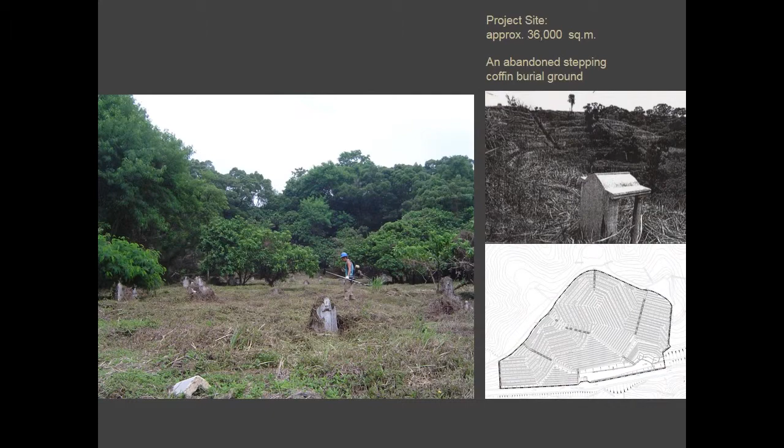The design of the columbarium makes use of nature to create a park-like environment for worshipping. The site was originally an abandoned stepped burial ground. The main niche block is tucked into the valley of the existing topography to minimize slope cutting.

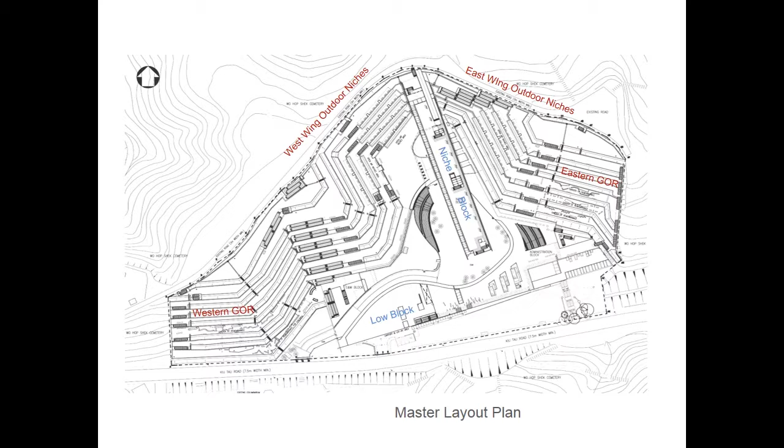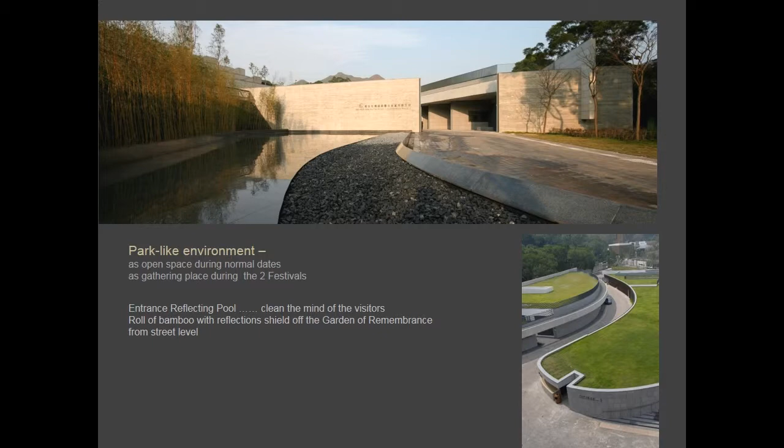A meandering path brings thousands of visitors to the central plaza area during the Qingming and Chung Yeung Festivals. They are then distributed to the main niche block as well as to the external niches through the two large steps. A reflecting pond located at the entrance helps to clear the minds of the visitors before they enter into the premises.

Timber strips are introduced to the facade of the niche block. They help to shield off the unwanted views of the niche bays when viewed from the street below, and at the same time they give warmth to both the exterior and interior of the building.

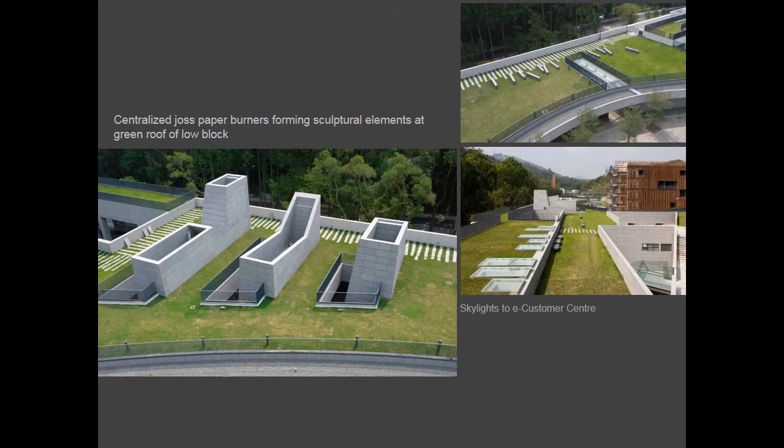By deleting the incense burning troughs at the bottom of the niche walls, and by relocating the joss paper burners to the lower block, an almost smoke-free environment is now provided for worshipping. The chimneys of the burners also form sculptural elements of the roof garden of the lower block.

To cater for the needs of the young generation, an electronic customer center is provided for carrying out worshipping through internet services. A spiral lawn outside the center symbolizes rebirth after death in Chinese culture. A reflecting pool with stepping stones ending at the middle of the pond symbolizes the revisiting of one's life when one looks down to see his own reflection under the sky in the water.

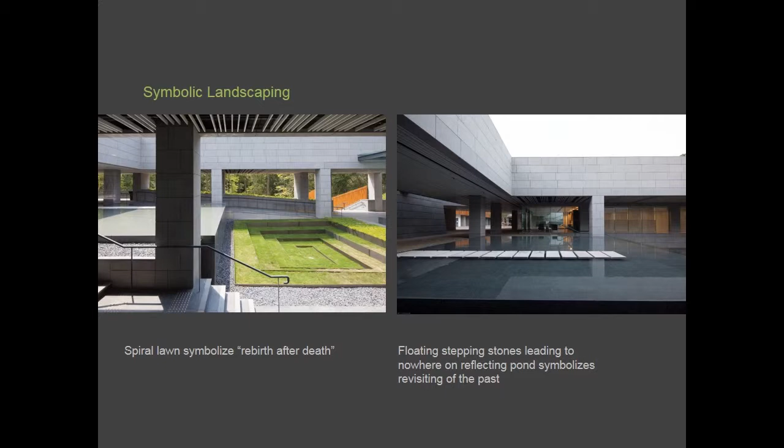Various themes are also introduced to the Garden of Remembrance to encourage the use of bone ash scattering as an alternative to niche burial.

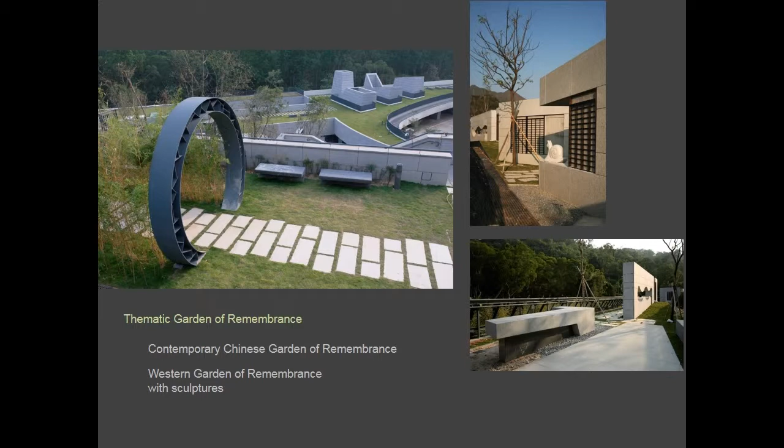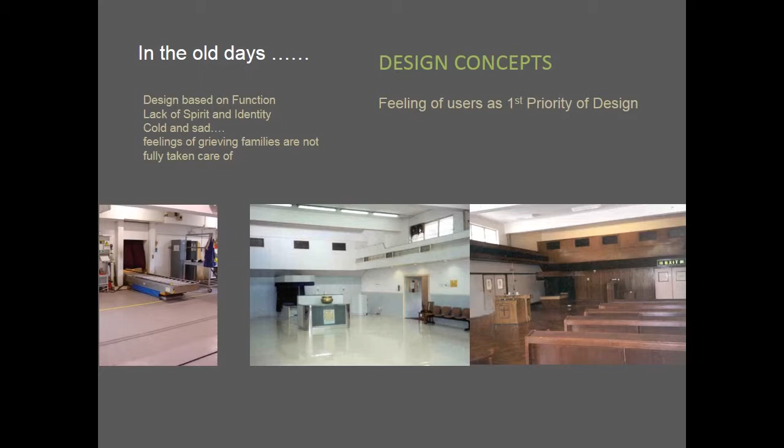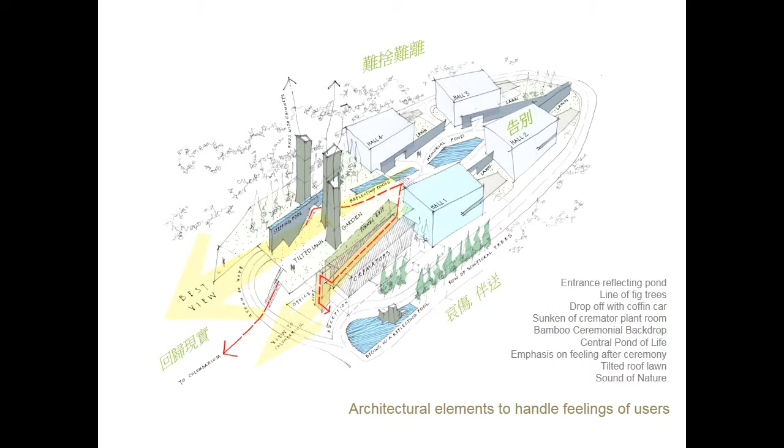Let's take a look at the crematorium. In the old days, crematoria were designed based on function only. They did not fully take care of the feelings of the grieving families. In our design, we take the emotions of the grieving families as the first priority. Starting from the entrance of the premises, the visitors are calmed down by a reflecting pond. They are then allowed to fully escort the coffin and enter the ceremonial halls.

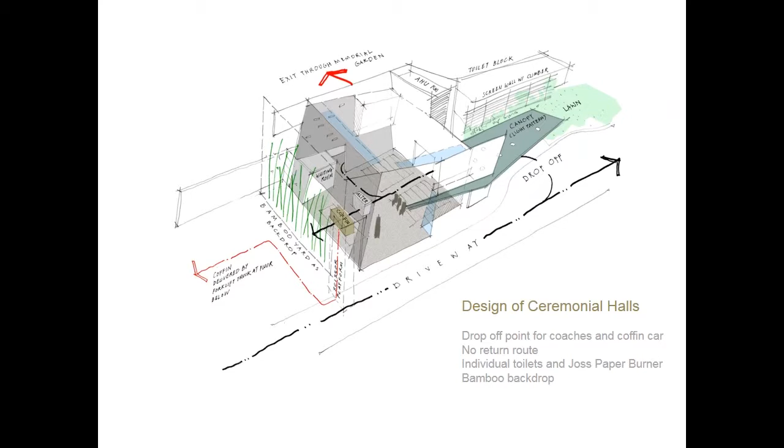For traditional ceremonial halls, the backdrop of the altar was always curtains leading to the cremation room. For this project, the cremation room is now one floor below the halls. The backdrop of the altar now becomes natural bamboo. When the filial son presses a button right next to the altar, the coffin will sink down to the cremation room slowly, recalling the most respectful way of ground burial in Chinese tradition.

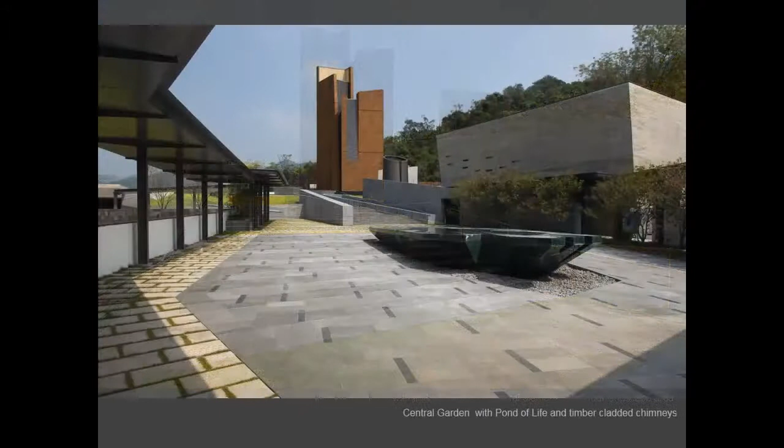We also pay special attention to the feelings of the grieving families after the ceremony. They are now provided with central landscaped gardens and a tilted roof lawn for meditation. At the garden, there is a pond of life. Bubbles emerging from the bottom of the pond symbolize the birth of human life. A waterfall at the tilted lawn creates a sound of nature which helps to reduce the sorrow of the grieving families before they return to the daily world.

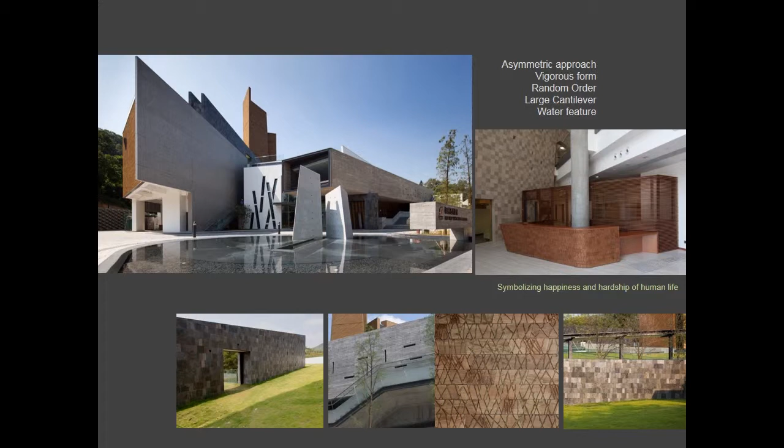The dynamic forms, random openings, rustic slates, and textured fair-faced concrete symbolize the happiness and hardship of human life. With the balance of reflecting ponds and green lawns, the project comes out to be a place of peace and silence.